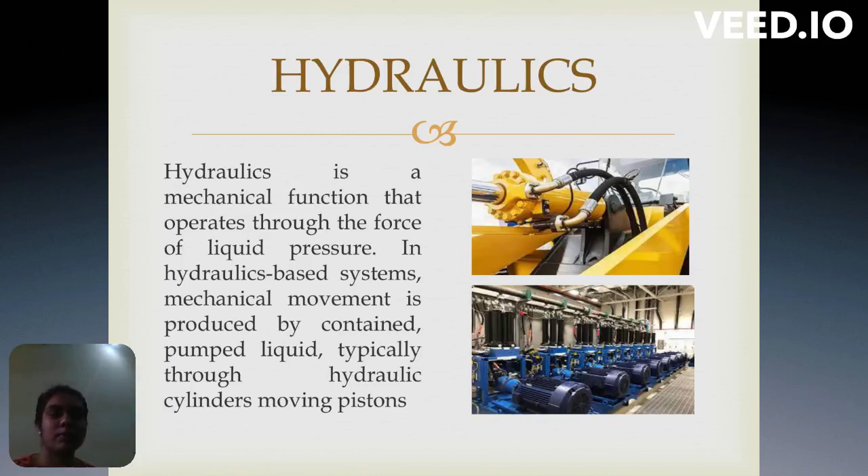Hydraulics is a mechanical function which operates through the force of liquid pressure in a hydraulics-based system. The mechanical movement is produced by contained pumped liquid, typically through hydraulic cylinders moving pistons. Hydraulic engineering is an application of fluid mechanics to problems dealing with the collection, storage, control, transport, regulation, measurement and use of water.

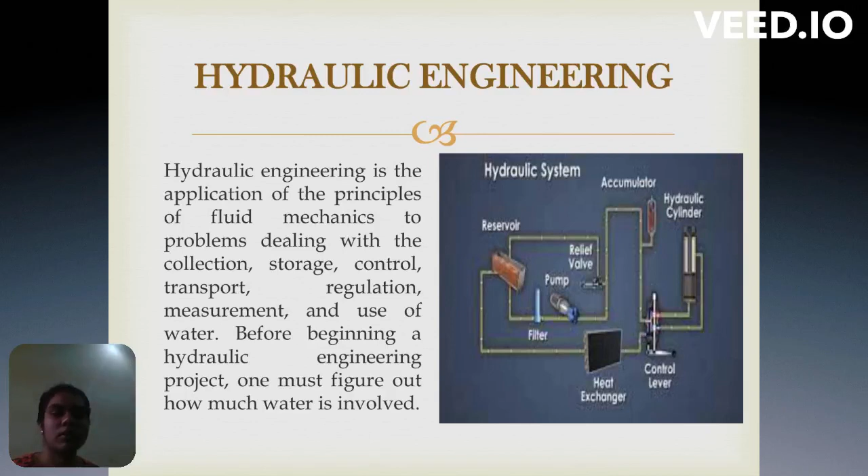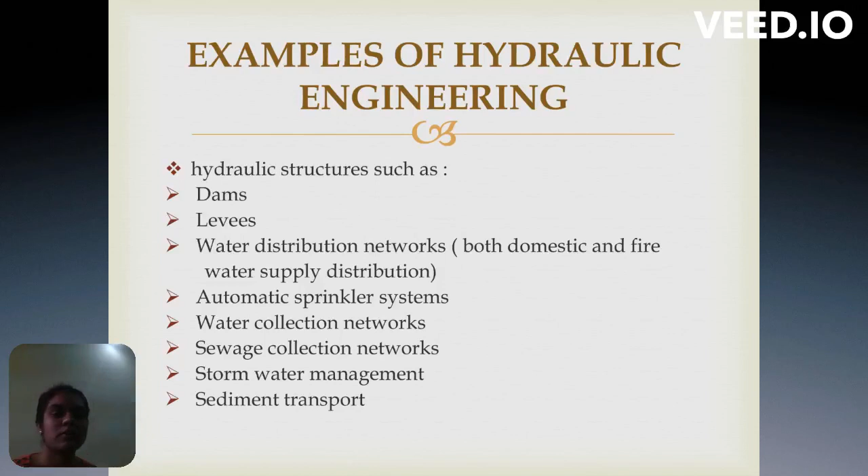We must always remember to figure out how much water is involved before starting an engineering project. Some examples of hydraulic engineering are dams, levees, water distribution networks, automatic sprinkler systems, water collection networks, sewage collection networks, storm water management, and sediment transport.

Next is the importance of hydraulics. Hydraulic systems are more efficient than pneumatic systems, using less energy and eliminating less heat. They are also flexible and valuable during periods of design revisions and for optimizing production capacity.

Hydraulic systems also give us greater control over machine settings, reducing wasted time and errors in the production process. They also allow seamless integration of new products into existing manufacturing lines.

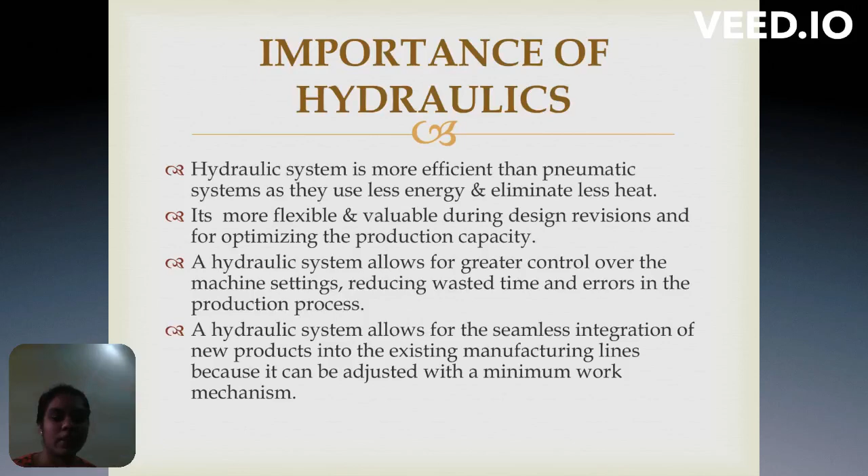Hydraulic systems can adjust with minimum work mechanism. Some advantages of hydraulic engineering: it is easy to control and accurate, allowing us to start, stop, accelerate, and slow down the system using simple levers and push buttons. It's also easy to spot leakages in a hydraulic system.

A large amount of power can be transmitted through a hydraulic system using small flexible hoses and tubes. Hydraulic components also allow micrometric speed variations and minimize undesirable noise. These are some of the advantages of hydraulic engineering.

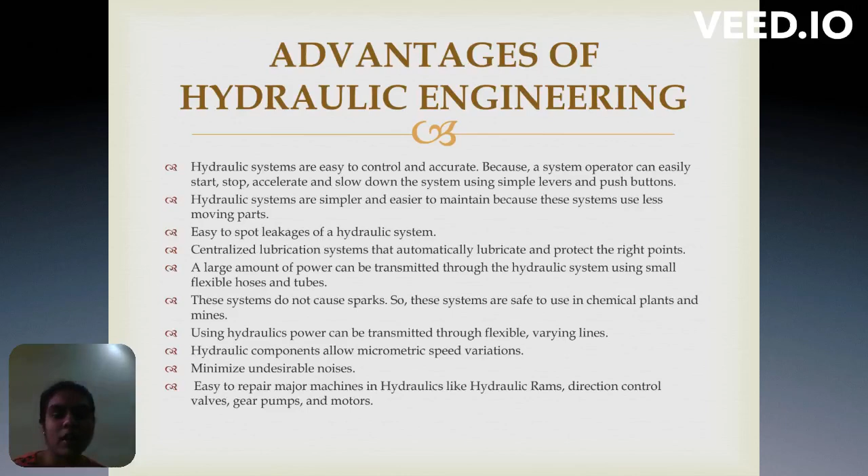Scopes and projects of hydraulic engineering include groundwater inventory, recycling of wastewater, dual purpose water supply, domestic water treatment plants, and rainwater collection. Hydraulic engineering is basically a conceptual design for various features.

It allows us to interact with waters in a way like through spillways, outlet works for dams, etc.

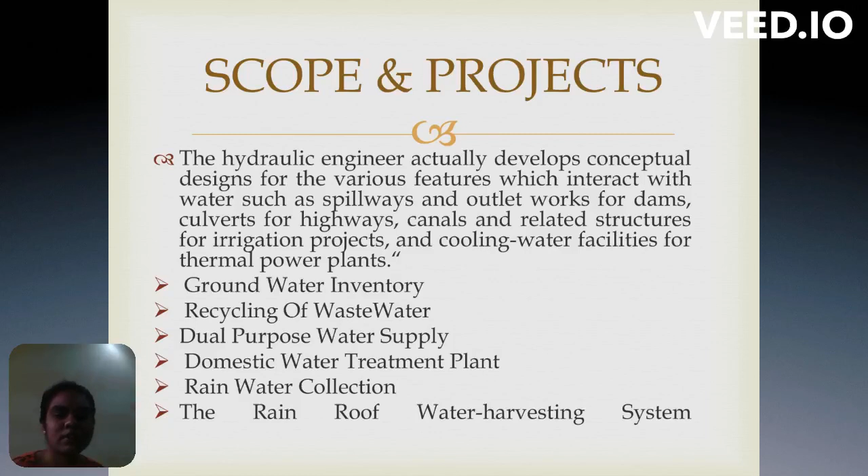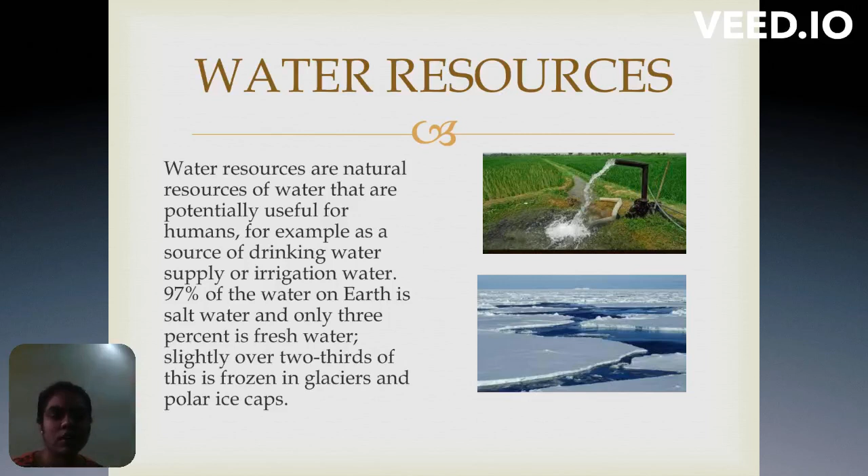Of the water on the earth, most is salt water, and only 3% is fresh water. Over two-thirds of this fresh water is frozen in glaciers and polar ice caps. Some examples of water resources are lakes, rivers, oceans, groundwater, deep subsurface waters, and glaciers.

Water resource engineering is the study and management of equipment, facilities, and techniques which are used to manage and preserve life.

Some importance of water resources engineering: it is essential for managing water resources, and it ensures the availability of clean drinking water and efficient water for agriculture purposes. It also helps improve water quality, provide the best water quality for humans, and helps protect the environment.

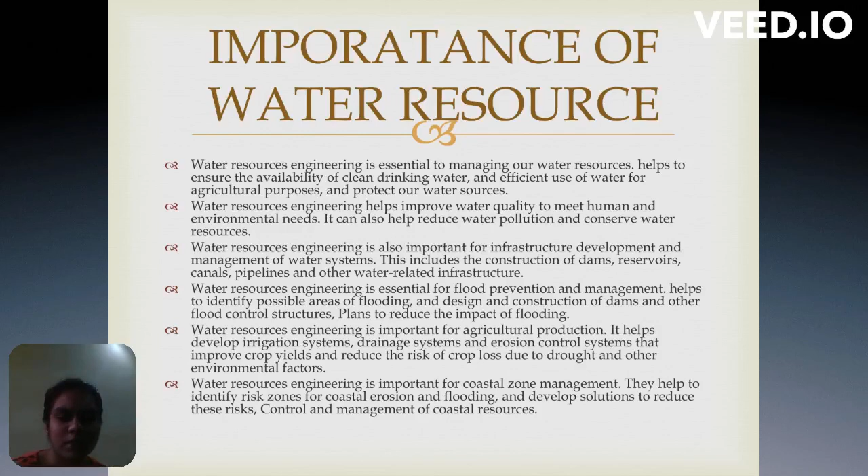It also reduces water pollution and helps us conserve resources. Water resource engineering is very important for infrastructure development and managing water systems. It also includes construction such as dams, reservoirs, pipelines, etc.

Some branches of water resource engineering are hydrology, hydraulics and groundwater engineering, hydropower engineering, soil water conservation engineering, coastal engineering, water quality engineering, and water resource planning and management.

Water resource engineering challenges include availability and accessibility of water resources. The availability of resources is influenced by a variety of factors such as climate change, population growth, and pollution. As the population grows, water demand also increases, causing difficulty for people in getting necessary water resources.

The second challenge is sustainability. Engineers are tasked with finding solutions for water problems while balancing the needs of the environment and local communities. As pollution increases, there is a decrease in the amount of usable water available.

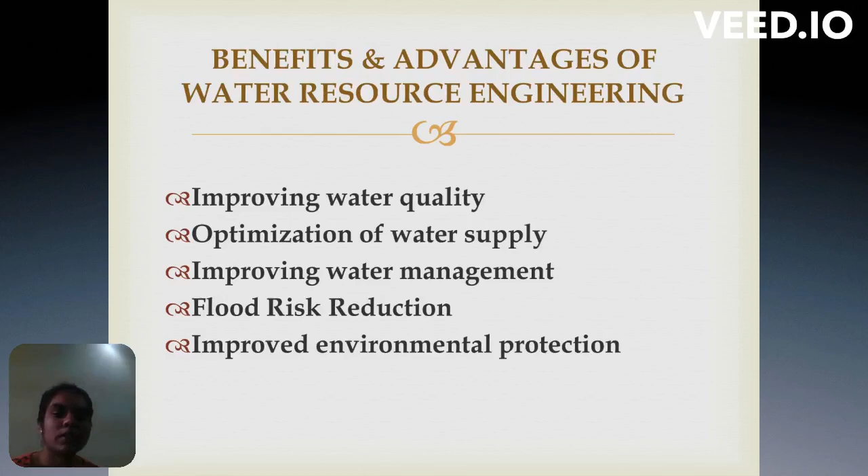Some benefits and advantages of water resource engineering are improved water quality, optimizing water supply, improving water management, flood risk reduction, and improved environmental protection.

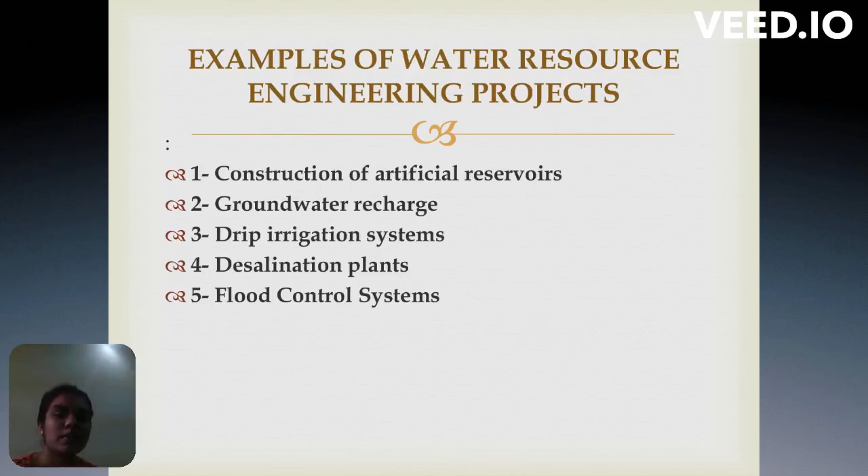Some examples of water resource engineering are construction of artificial reservoirs and groundwater recharge, drip irrigation systems, desalination plants, and flood control systems.

We can conclude that water resource engineering is an application which involves technology and expertise to manage and conserve water resources to meet the needs of society, through a variety of activities like water supply, water quality, drainage, and flood control.

Water resource engineering is important because it provides access to clean, safe, reliable water for drinking, and it also helps protect people and property from floods and other natural disasters.

Some benefits include overall health improvement and increase in water supply, improved water quality, improved agriculture productivity, and improved water resource management. Water resource engineering is also a part of any society, which helps us, and its importance and benefits will continuously increase as population and climate change.

Water resource engineering is a field where we can focus on management and protection of water resources, as it combines elements of civil engineering, hydrology, geology, and other sciences for solving related problems, like water supply and flood control. Water pollution and related issues can also be reduced through water resource engineering.